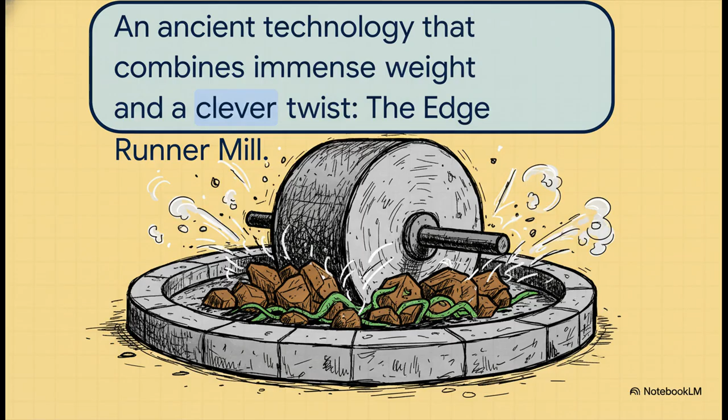Well, the solution has actually been around for centuries, and its genius is just how simple it is. It's called the Edge Runner Mill, and it absolutely masters the art of pulverizing things through pure, awesome brute force. So, how does this thing actually pull it off? How does it succeed where other machines fail?

Well, it's not just about being heavy. The real secret is in the physics. It's all about two different forces working together in this perfect, kind of destructive harmony. Okay, so the first principle is pretty straightforward. It's called compression. This is just raw, crushing power.

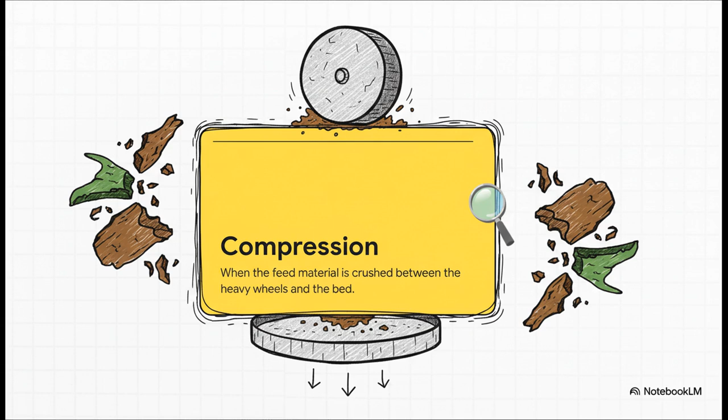Just picture a massive, super heavy wheel rolling over something. That immense downward pressure, that's compression. It's the powerful stomp that gets the whole breaking down process started. The compression, that's only half the story. The second principle, and this is where it gets really clever, is called attrition. This is all about shearing force.

See, as that heavy wheel rolls, it isn't just pressing straight down. It's also creating this twisting, scraping motion. This makes all the little particles rub against each other and the grinding surface, basically tearing each other apart. It's this grinding, shearing force that works right alongside the compression.

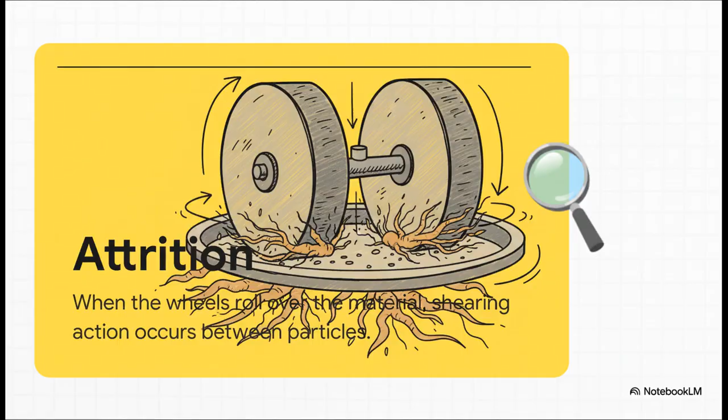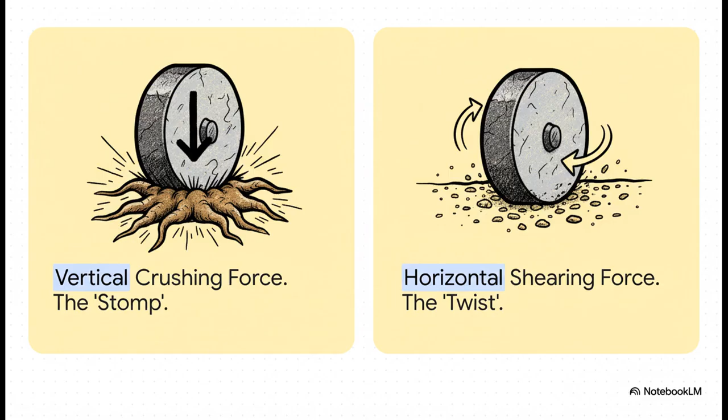So there you have it, the 1-2 punch of the Edge Runner Mill. First, you get that vertical stomp from compression, which just shatters the material's structure. And right after that, you get the horizontal twist from attrition, which shears all those little pieces into even finer particles. It's this exact combination that makes the mill so unbelievably effective.

Okay, so we get the physics, right? But what does this thing actually look like? What are the key parts that make up this grinding giant? Let's kind of build one in our heads, piece by piece. All right, it all starts with the foundation. For this mill, that's a big, circular, and pretty shallow pan or bed. It has to be incredibly tough to handle all that pressure, so you'll see them made of something super durable, like solid granite or heavy-duty metal.

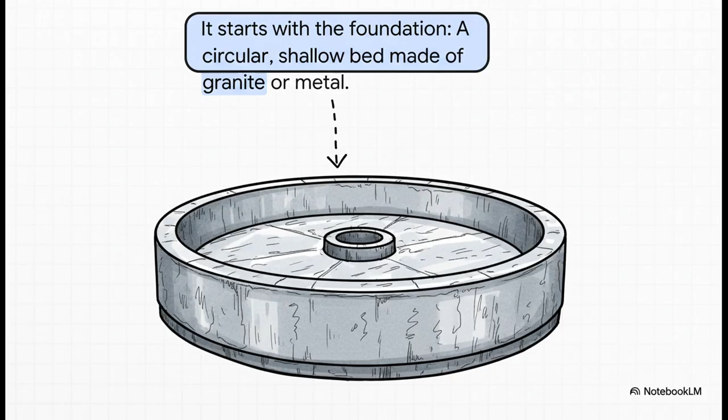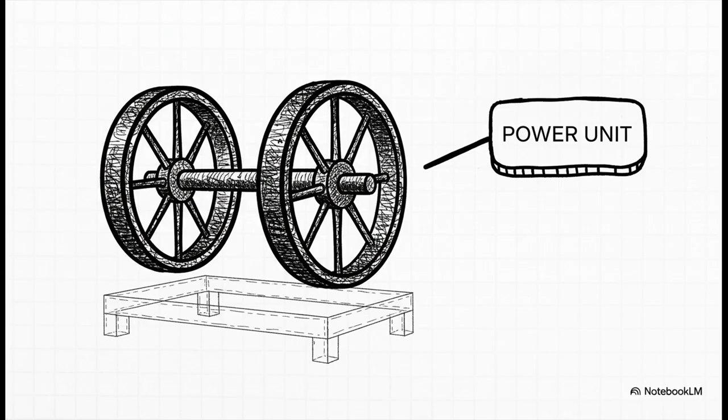Now for the part that does all the work. We're talking two massive, super heavy wheels that are mounted upright on a single horizontal axle. These guys are the edge runners, and yeah, all that weight, that's where you get that crushing compression from.

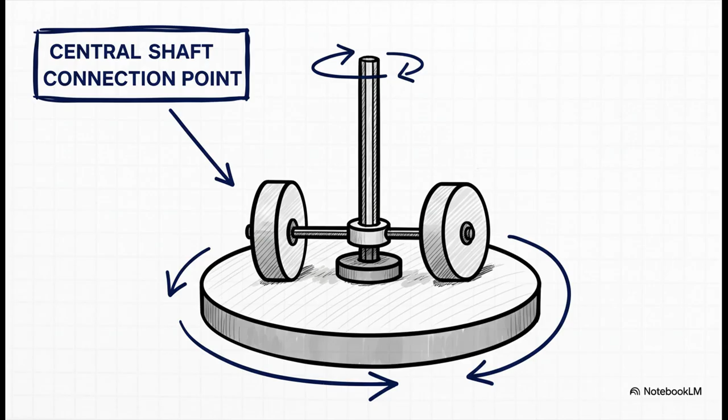Okay, but how do these things actually move around? Well, there's a central vertical shaft that connects right to the middle of that axle. When that main shaft starts to turn, and this could be from a motor or even an animal in the old days, it makes the whole wheel setup spin around that circular bed. Kind of like planets going around the sun, you know?

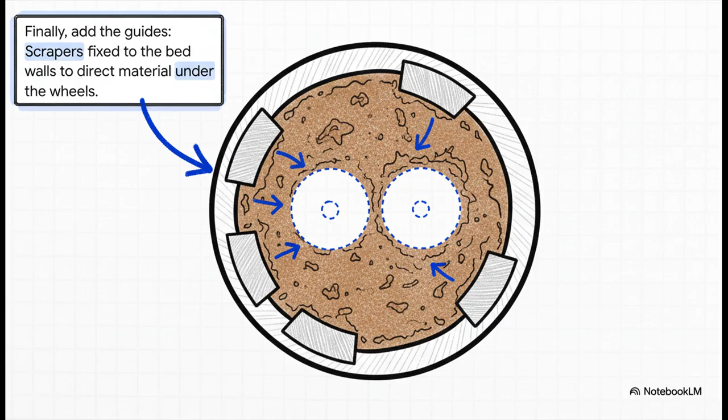And there's one last little detail that's actually super important for making it work well. As the wheels roll, they tend to push the material out to the sides. So to fix that, you've got these scrapers attached inside the bed. And their job is super simple, but absolutely essential. They just keep pushing everything back into the path of the wheels, making sure nothing can escape the grind.

All right, so we've got our mill built, we know the forces at play. Let's fire this thing up and see how it all comes together in action, from beginning to end. The whole process is this really elegant, simple loop. First, you just load the material into the bed. Then you kick on the drive, and those heavy wheels start their slow, powerful rotation.

With every single pass, they're crushing and shearing the material. The scrapers do their job, pushing everything back under the wheels, and that cycle just keeps going. Stomp, twist, scrape, and repeat. It goes on and on until you get exactly the particle size you're looking for.

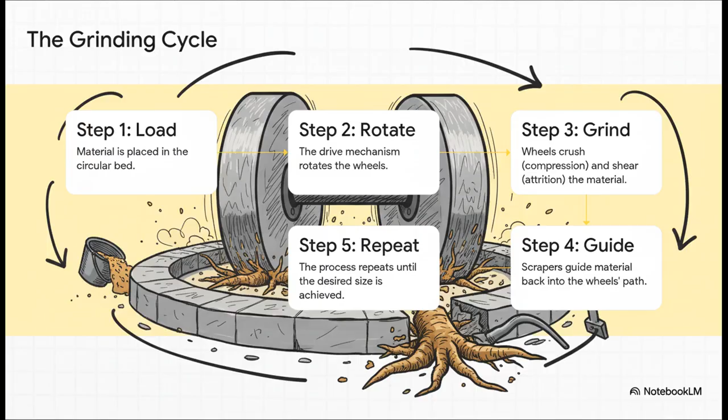Now, I know what you might be thinking. This sounds like some really old tech, right? But the thing is, it's still surprisingly relevant. You'd actually be surprised where you can find these things working today. This mill is a workhorse, especially in industries that deal with tough, natural stuff.

So think about pharmaceuticals and herbal medicine, where it's perfect for grinding up dense roots and fibrous barks. But it's also great for mixing things, like creating really uniform ointments and pastes. Basically, if you need to break down something stubborn and fibrous, this old-school design is still one of the best tools for the job.

So what's the verdict here? What's the final takeaway on the Edge Runner Mill? I mean, it's powerful, it's simple, but it's definitely not perfect. Let's break down the pros and cons. So on the good side, its design is super simple. That makes it easy to run and easy to fix. It can handle wet grinding just as well as dry grinding, and like we've been saying, it's the champion when it comes to tough, fibrous materials.

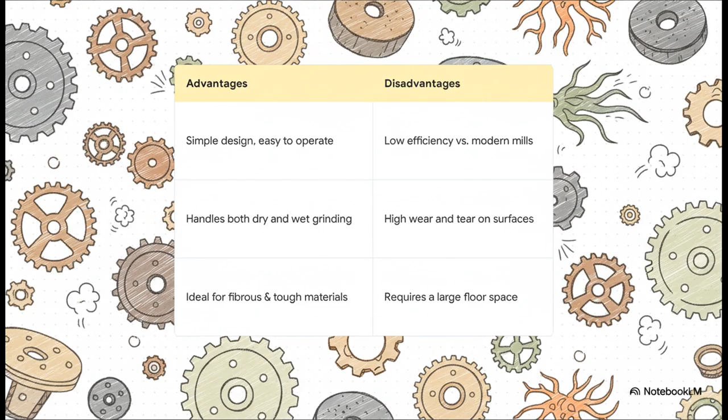But, on the other hand, it's not exactly what you'd call efficient. Not compared to modern high-speed mills anyway. All that grinding, well, it causes a ton of wear and tear on the surfaces, and these things are huge. They take up a massive amount of floor space.

And all this kind of leaves us with a really interesting question, doesn't it? In our world of high-tech, super precise machines, the Edge Runner Mill feels like something from another time. It's not fast, it's not precise, but it is incredibly good and reliable at its one single job, crushing the stuff that nothing else can. So it really makes you think, where else in our world does a simple, tough, brute force design still come out on top? Something to chew on.